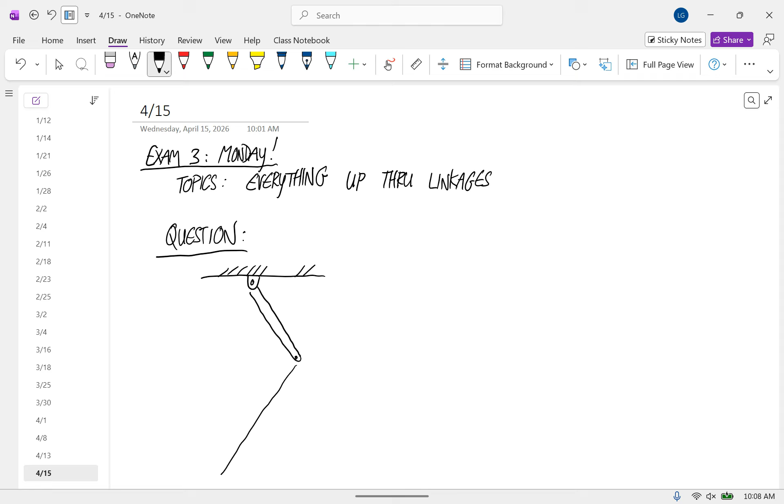But I could also specify in problems that the angular velocity of this body is this, and the angular velocity of this body is this. So think about a problem like this: let's say we have a bar connected to the ceiling here, and then a different length member connected to a pin and slot joint here.

Let's say that at this instant - call this one member 1 and this one member 2 - omega of 1 was equal to negative 10 radians per second.

So think about what's happening with member one. Is that moving clockwise or counterclockwise? Clockwise. So that's saying that this structure is flattening, right?

And let's say that omega of member two is negative 20 radians per second. So what direction is member two rotating at this instant? It's going clockwise, which says that this structure is, instead of flattening, straightening out.

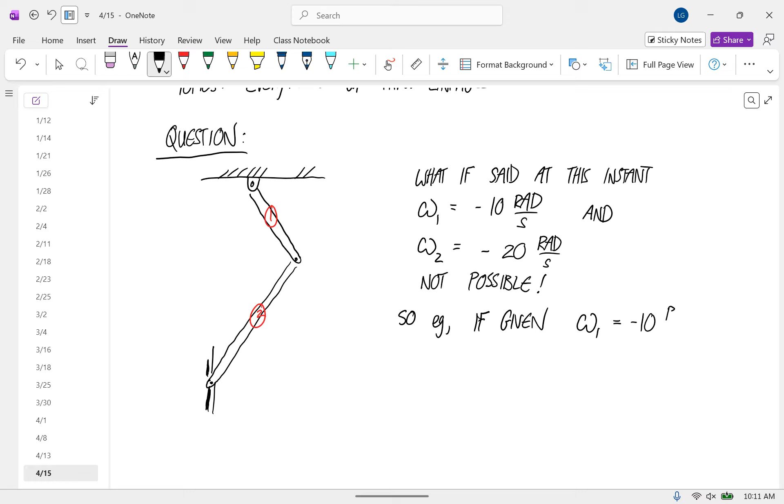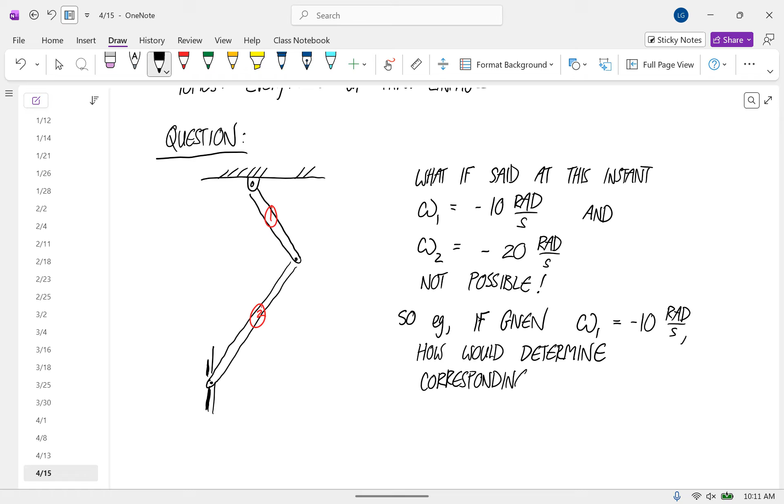For example, if we're given that the angular velocity of 1 is equal to negative 10, how would we determine the corresponding omega 2?

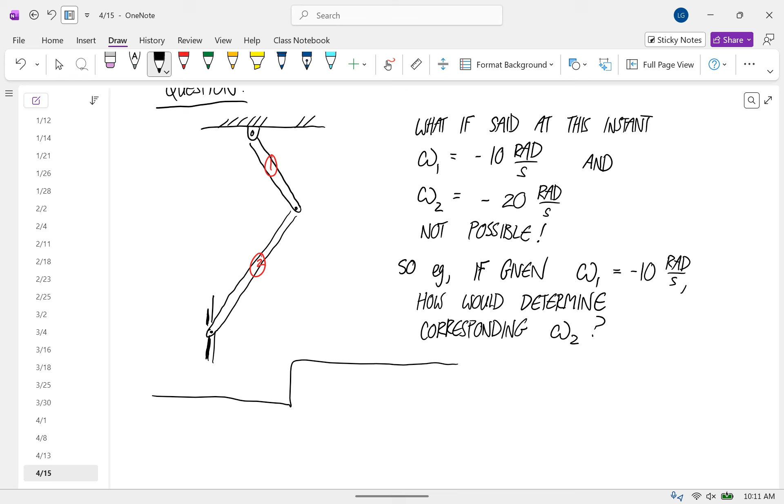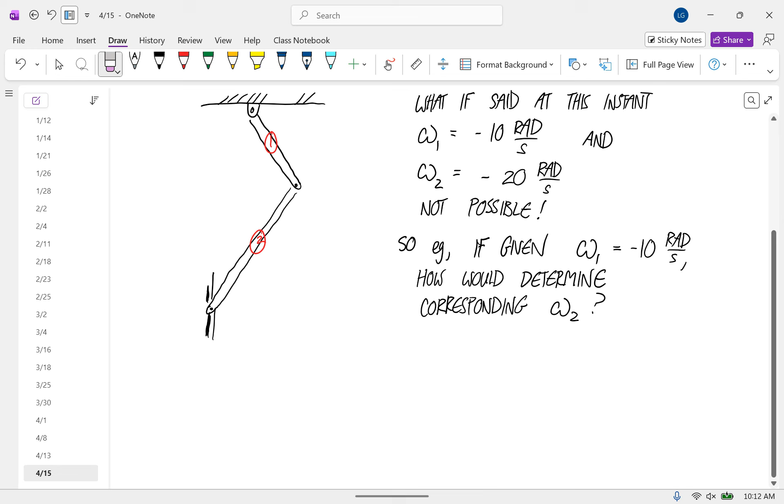Anybody have any guesses about how we would do this? It's similar to something that we've done with accelerations. So yeah, you have to use relative motion and circular motion. The basic idea is just like with the acceleration joint constraints - we'll put constraints on the velocity vector at chosen points.

Okay, so for this setup that we have here, what are the limits that we're going to put on the velocities at certain points?

So if I call this joint A, B, and C, B is going to have the same velocity. Yep, that's exactly right. So we're going to use member one to calculate the velocity at B, and member two to calculate the velocity at B, and set them equal. And then here, we're just going to say there can't be any horizontal velocity—the only velocity has to be vertical along the slot. Okay, so it works just like acceleration, but it's with velocities.

Okay, so let's do an example where we can kind of intuitively—okay, so we're going to go, in this case, the velocity at B according to body one, I don't know, I'm making up this notation, is equal to the velocity at B according to member two. And then the velocity at C, just the x component, is equal to 0.

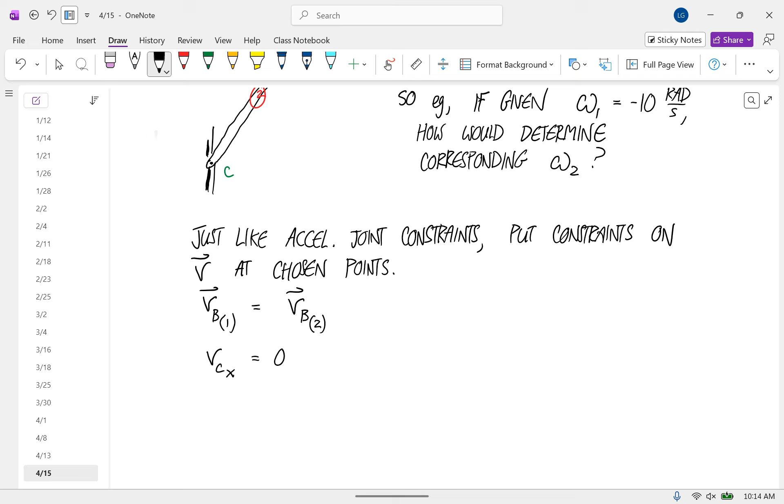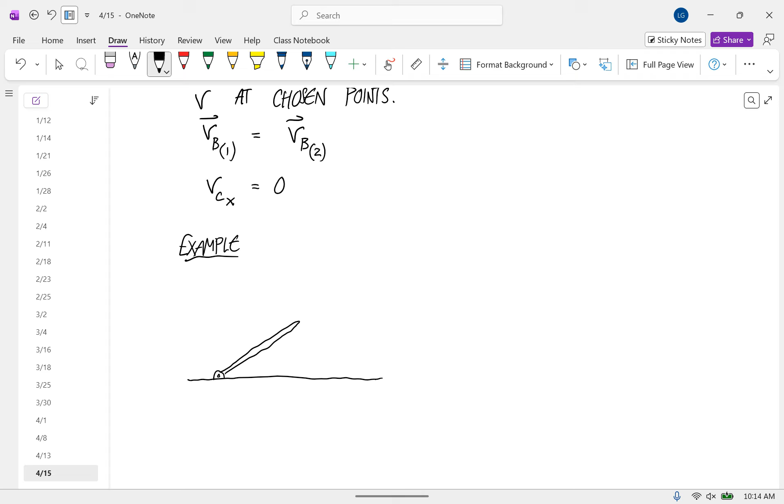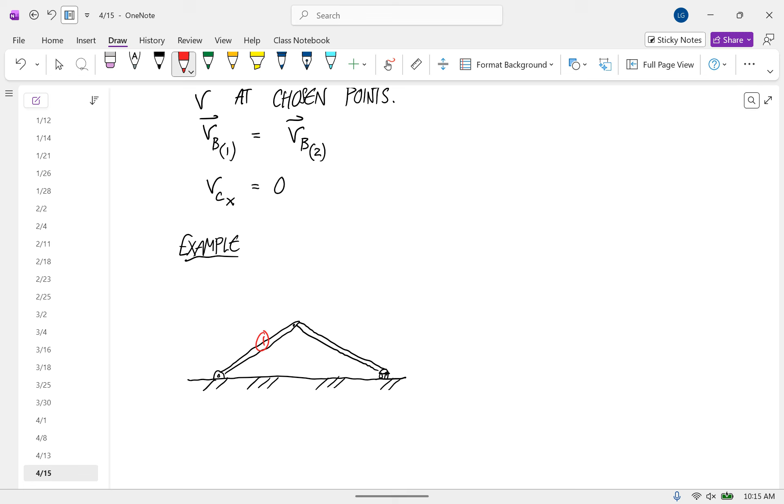Okay, so let's do an example, and I'm going to do one where we can figure out intuitively. Okay, so let's say we have one where at the instant we're looking at, okay, so that's a roller over on the right side. Let's call this member 1. This is member 2.

We're actually not going to get to the forces, but for a problem like this, let's say there's a force applied there. And let's say at this instant, we have an angle of 20 degrees. And the lengths of both of these members are 1 meter. And let's say that omega 1 is equal to, at this instant, positive 5 radians per second.

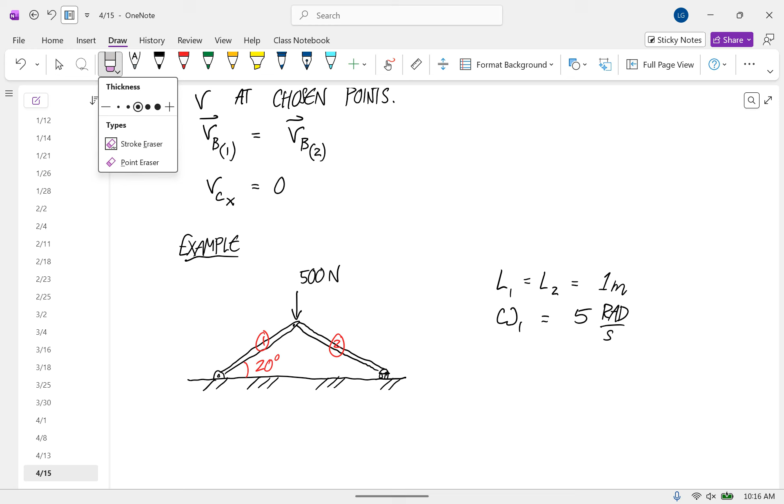So what's omega 2? Okay, so I chose a positive value of omega 1 just to be contrary. How is it possible that—so positive means that omega 1 is counterclockwise.

So this thing is standing up straighter. How is it possible that this system, with that force acting there, could have an angular velocity of, any counterclockwise angular velocity? Yeah, exactly. So, this free body diagram is instantaneous. And instantaneous stuff affects accelerations. Okay? Velocities only deal with accelerations as like an integral over time.

Okay? So clearly the angular acceleration of this is going to be clockwise. There's no way around that. But we could think of this as right up before this instant, there were forces pushing this up. And right at that instant, those forces disappeared and that 500 is applied. And the angular velocity just doesn't change instant by instant with forces. Only acceleration does that.

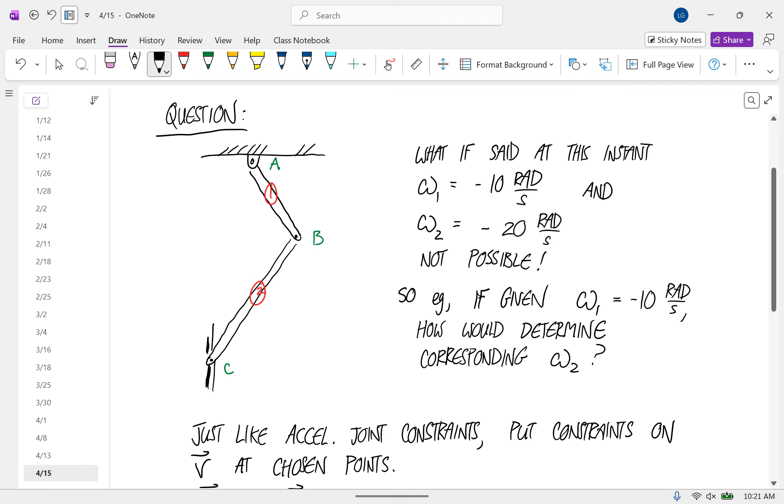In this example I drew up here, where those angles are not the same, it's more complicated. But you would do the calculation the same way. This is just one where we know going into it what to expect for an answer. So now we're going to do the calculation and see. We better get that omega 2 is equal to negative 5, or I quit.

We're going to do a velocity constraint. We have 1 and 2, let me call these joints A, B, and C. And I'm going to start with a velocity constraint at B.

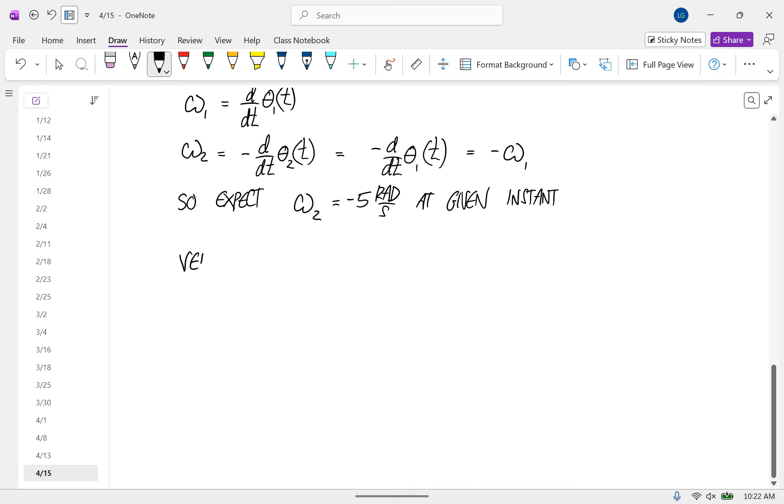According to member 1, notice how similar this is to the joint constraints we used in solving this linkage. Looking at member 1, that point B on member 1 is just in circular motion around A.

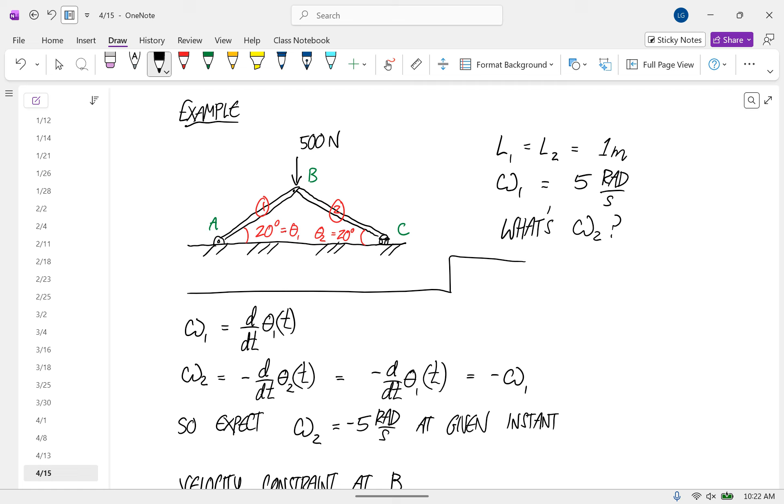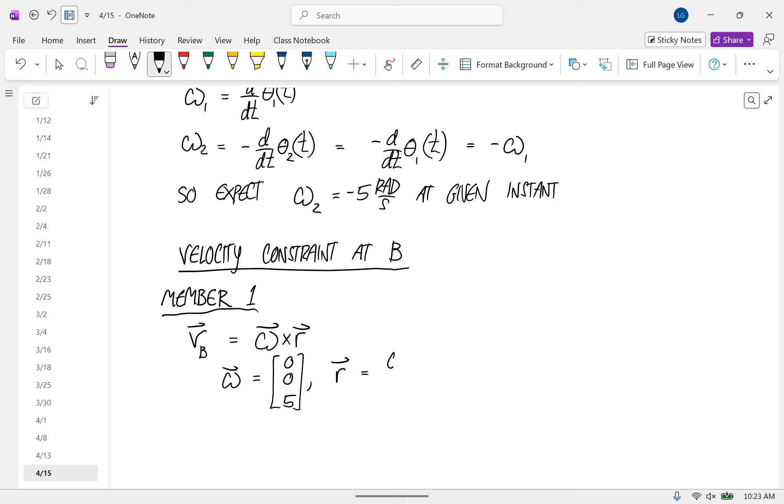So we're going to use the velocity equation. The velocity of point B is equal to omega cross R. The omega vector is equal to 0, 0, positive 5. And the R vector from the center of the circular motion to point B is the length 1 times cosine and sine of 20 degrees, so that's 0.940, 0.342.

So according to member 1, the velocity of B is equal to 0, 0, 5 crossed with 0.940, 0.342, 0. And we get negative 171, that is negative 1.71, and then 4.700. Okay, with me on that?

Now we'll go to member 2. According to member 2, we don't have a fixed center of circular motion, so I'm going to use relative motion. Like I do with acceleration, I'm going to use the center of mass here.

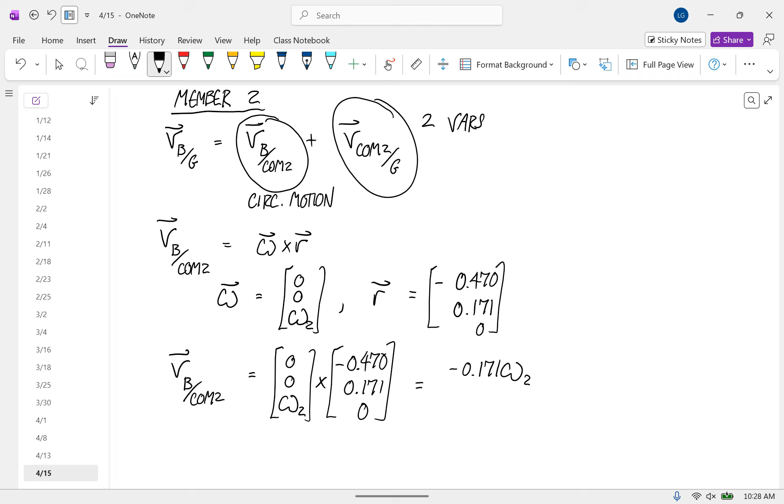So the velocity of B relative to the center of mass of 2 is 0, 0, omega 2, and R is equal to that. So this crossed with this, and we get negative 0.171 omega 2, and then negative 0.470 omega 2.

I'm going to give this a nice name, V2, like we do with accelerations. That refers to the velocity of the center of mass of body 2.

And so our constraint equation at joint B says negative 1.71, 4.700 is equal to, we have to add this to the velocity of the center of mass of 2: negative 0.171 omega 2 plus v2x, negative 0.470 omega 2 plus v2y, 0.

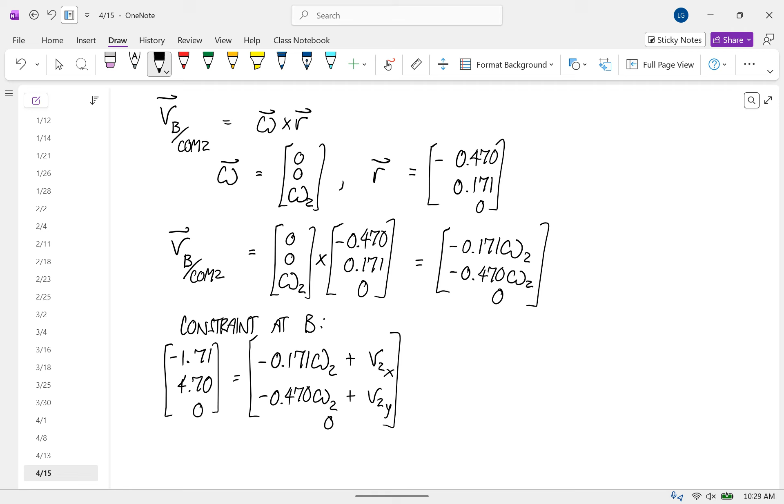So our system of constraint equations: our first one says negative 0.171 omega 2 plus v2x is equal to negative 1.71. Our second one says negative 0.470 omega 2 plus v2y is equal to positive 4.70.

Can we solve it? Not yet, but you can see where we're going. So far we have 2 equations, 3 variables. So where are we going to get that third equation? Yeah, the constraint at C.

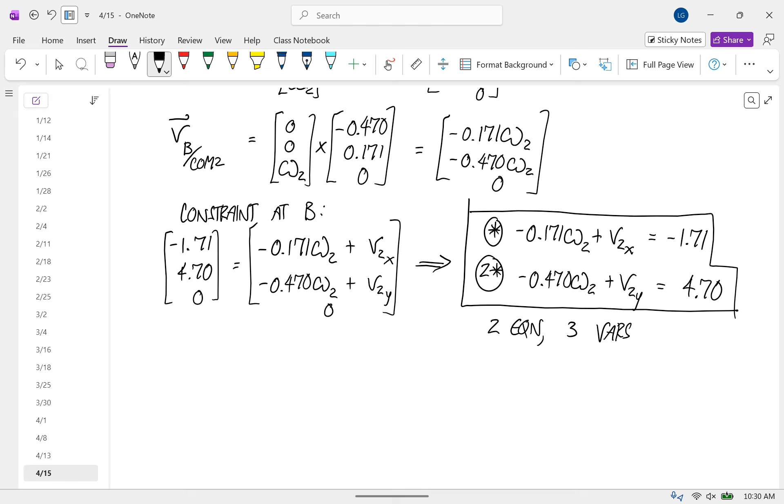Just like we do with constraint equations at pin and slot joints for acceleration, we're going to calculate the full velocity vector and just set the component equal to 0 that we know isn't moving. In this case, we know that it can't have an up or down velocity, so we'll set the y component equal to 0.

What if the slot in a pin and slot joint was not horizontal or vertical? What if it was at an angle of 20 degrees with the horizontal? I would think of it as a dot product. You could come up with a unit vector that's perpendicular to that slot, and then just set the dot product of that unit vector with the acceleration equal to 0. But you're right, you also could do it by thinking of it as right triangle trig.

So for the constraint at C, the member connected to C does not have a fixed point, so we're going to use the relative motion equation. The velocity of C relative to the ground is equal to the velocity of C relative to the center of mass of 2, plus the velocity of the center of mass of 2 relative to the ground. This one is our V2, we already have that named. And this one is circular motion.

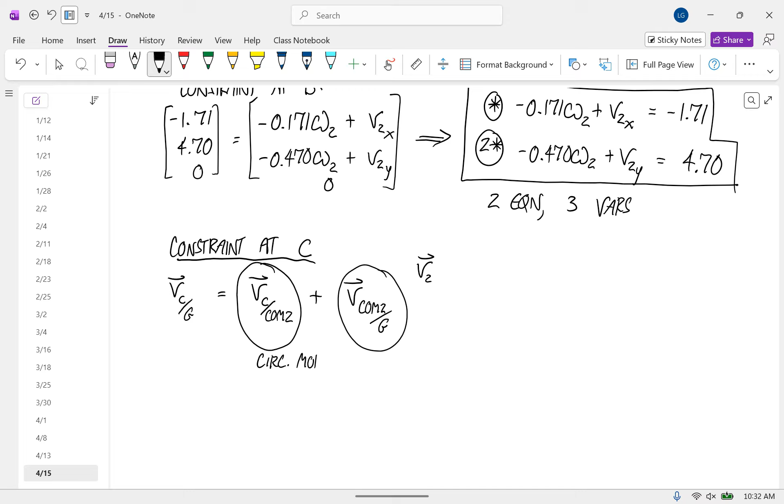So the velocity of C relative to the center of mass of 2 is omega cross r. Our omega is 0, 0, omega 2. And r is the opposite of the r we had in the last one. So that is positive 0.470, negative 0.171.

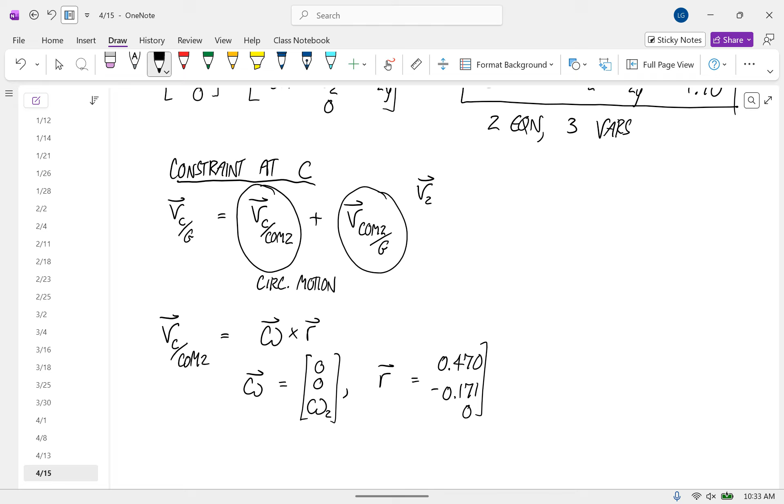So the velocity of C relative to the center of mass of 2 is 0, 0, omega 2, crossed with 0.470, negative 0.171, 0. That gives positive 0.171 omega 2, positive 0.470 omega 2.

The velocity of C relative to the ground is this plus V2. So we have 0.171 omega 2 plus V2x, and 0.470 omega 2 plus V2y, 0. We can't make any constraints on x, we don't know what that velocity is. But we know the y component of the velocity has to be 0. That's what that joint requires.

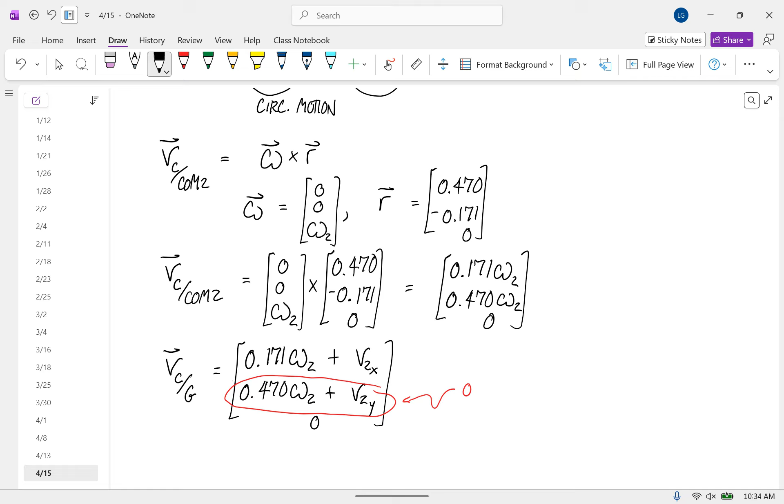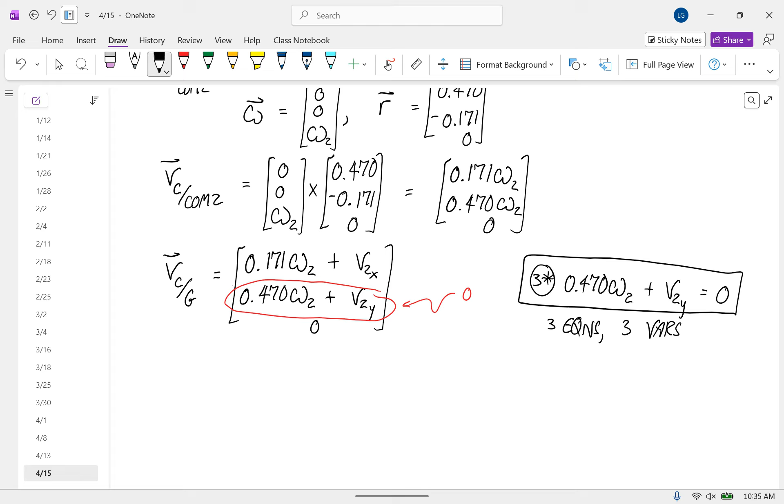Our third equation for our system says 0.470 omega 2 plus V2y is equal to 0. Now we have 3 equations for 3 variables. If we did everything right, this system of equations should spit out a velocity vector for the center of mass of body 2, which we don't care about, and an angular velocity for body 2, which we expect to be -5. So let's do it and hope.

So our augmented matrix has 3 rows, 4 columns. This is equation 1, 2, and 3. For variables, let's call it omega 1 - nope, omega 1 is not a variable, we knew what that one was. Omega 2, V2x, V2y, and the constants.

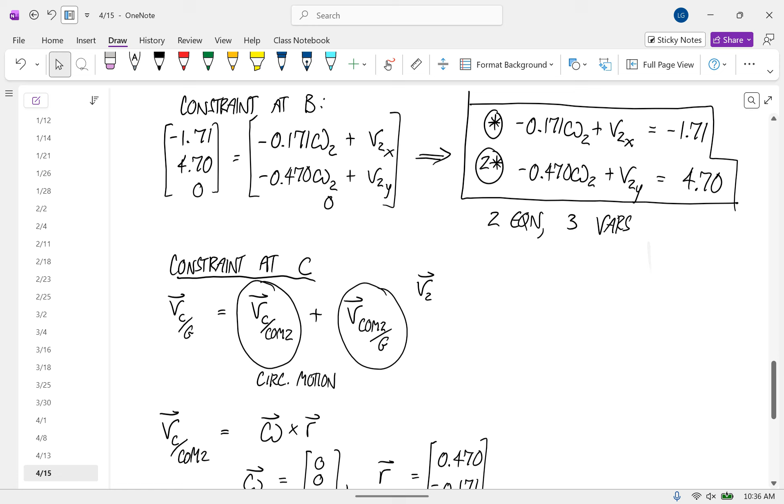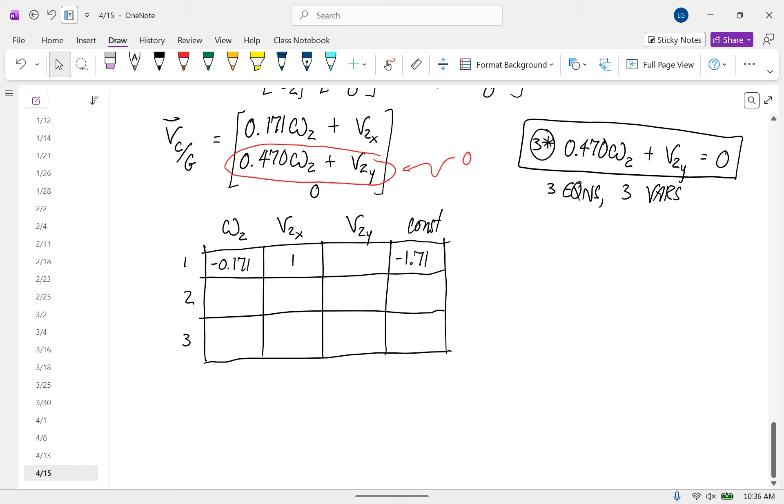So for omega 2, we have -0.171. For V2x, we have 1. For the constant, we have -1.71. Now equation 2: omega 2, -0.47; V2y, 1; and the constant, 4.70. And for equation 3: omega 2, 0.470; V2y, 1; constant 0.

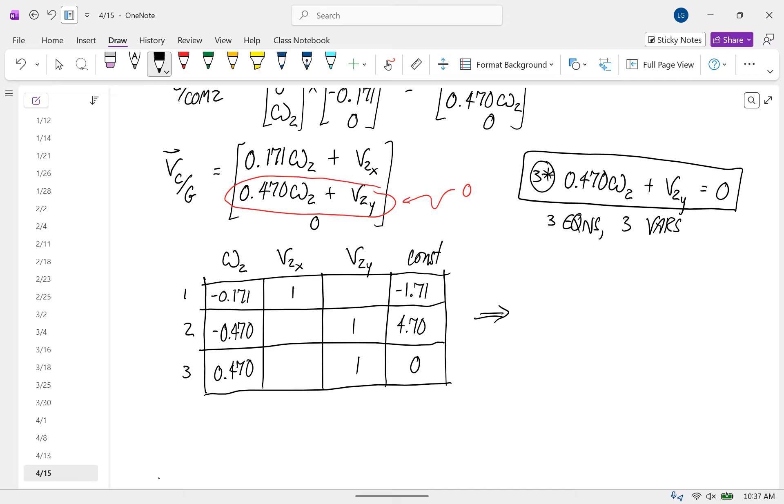We've been doing rigid bodies. You weren't here on Monday, and I was so conscious, like I better turn this on because no one's going to tell me if I don't. Okay, we've been doing rigid body kinetics and doing that with linkages.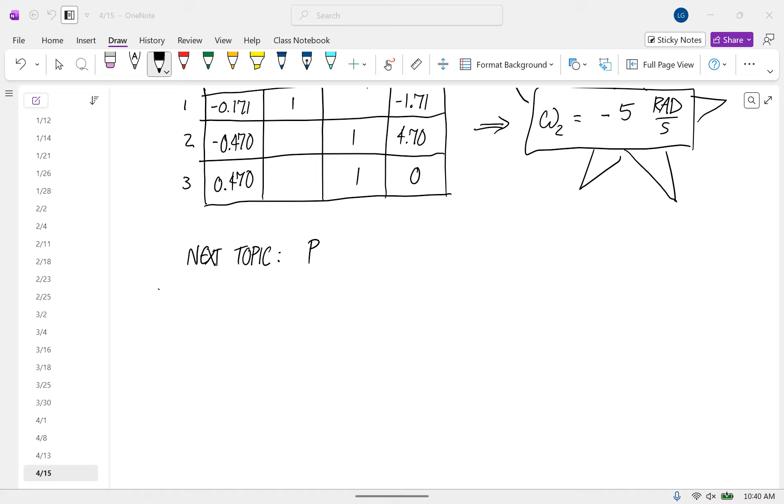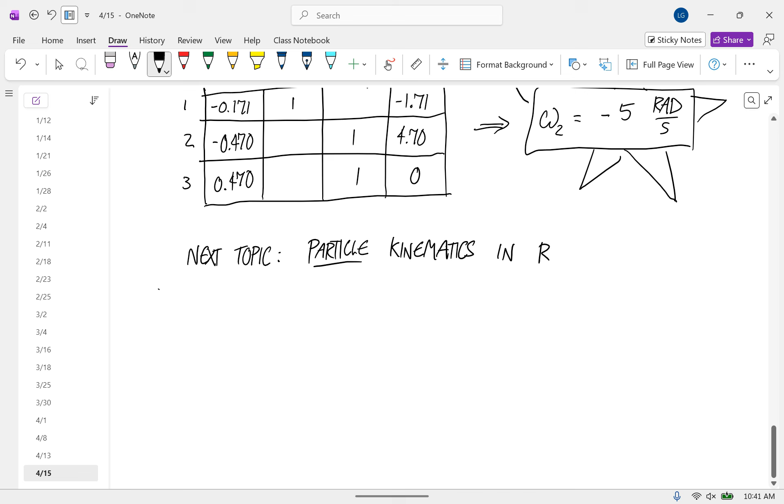Now we're going back a step to particle kinematics and particle kinetics. Remember that here we're just dealing with particles. I'm going to start with kinematics, but the difference between particle kinematics and particle kinetics isn't much - you're just multiplying by masses, basically. But we're adding a horrifying new bit of complexity: now we're going to deal with rotating coordinate systems. Notice that we're going back from rigid bodies to particles.

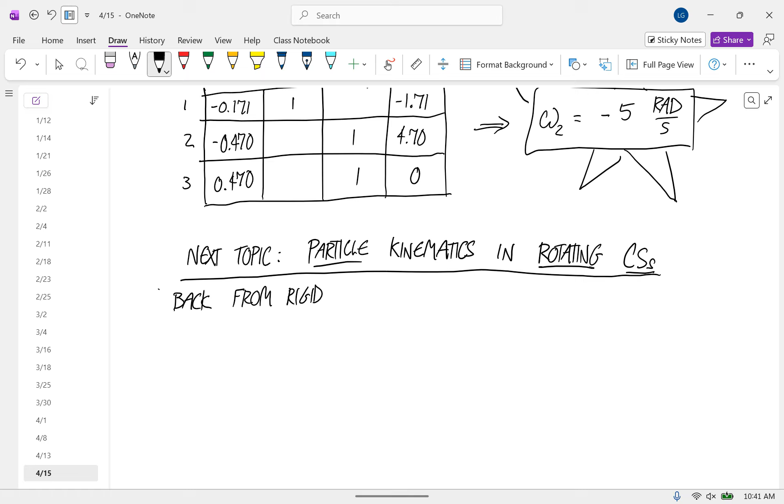There are two types of coordinate systems, or let's say there are two ways that a coordinate system can fail to satisfy Newton's laws. Another way to say that is there are two ways that a coordinate system can be non-inertial. If you have a non-inertial coordinate system, the measurements you take in that system, if you put them into Newton's laws, it's going to look like Newton's laws don't work. So the first one is that the origin of the coordinate system is accelerating.

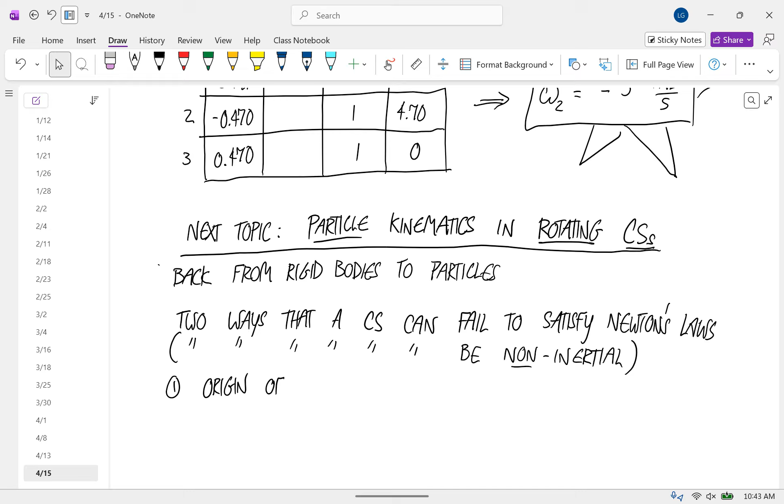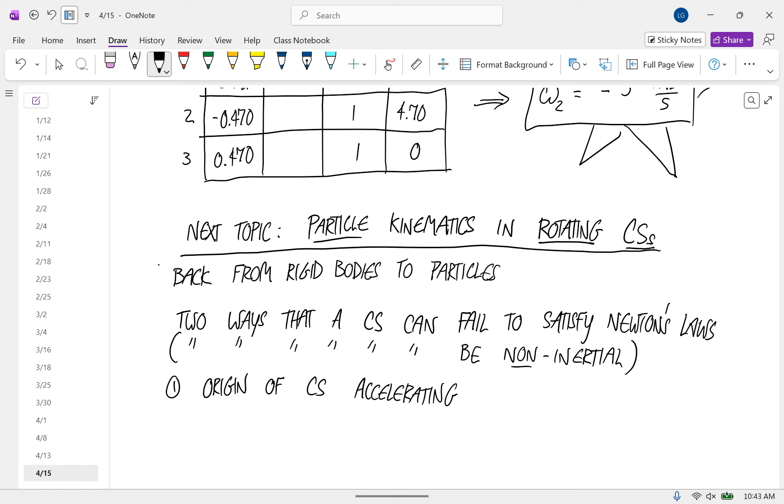We're doing classical physics now, so if anybody here is taking modern physics, this might contradict the way you think about things. In classical physics, there really is such a thing as a true non-accelerating thing - that's a universal property. Something either is or is not accelerating. And if that's your problem with your coordinate system, we've dealt with things like this before. How do you deal with that so you can come up with numbers that can be used in Newton's laws?

Yes, exactly. So we deal with this - all I'm thinking about is that video, the Jamiroquai. Exactly, that's what I want you to think about. Oh, the song. Yeah, sure. Actually, you know what's funny, that just came on like a Pandora playlist at our house the other day, and my wife was like, 'This is that song you like.' And I was like, 'Yeah, that's my favorite song for physics.'

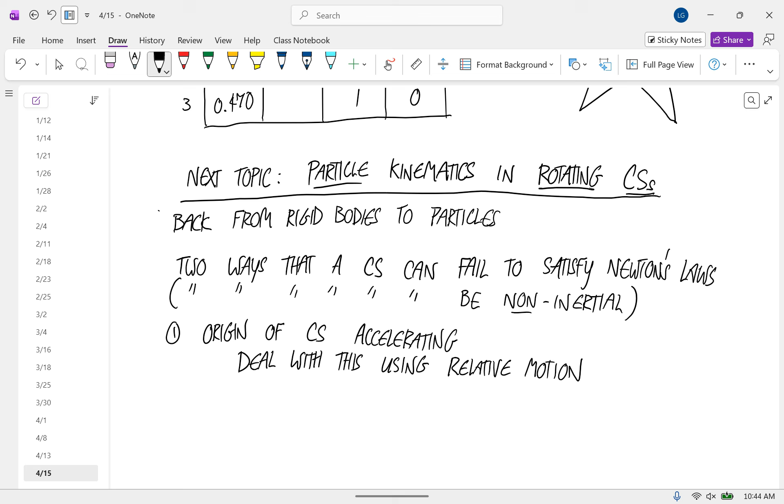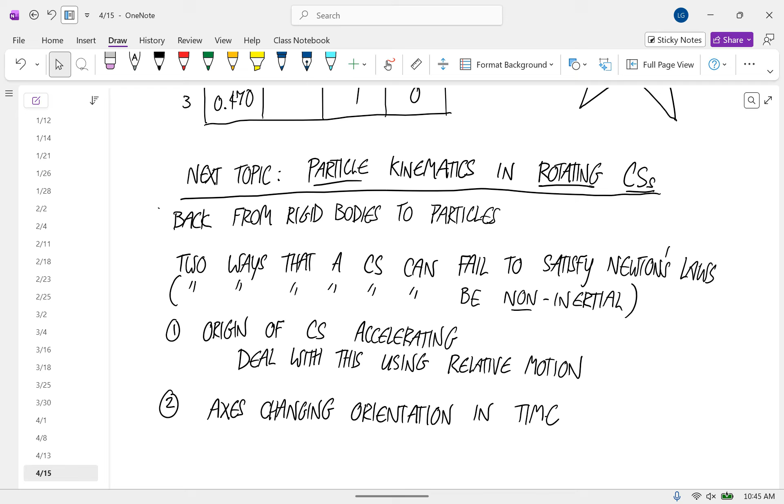Okay, so we deal with this using relative motion, and we've already done that many times, and it's not too hard to do. The second way a coordinate system can fail to be inertial is that the axes are changing orientation in time. Another way to say that is it's a rotating coordinate system. And this is the topic we're covering now, so we'll learn how to deal with this.

What if you have a coordinate system that is rotating and the origin is accelerating? It's not extra bad, really. You just have to deal with the rotating coordinate system and then take that answer and use relative motion. So you just have to do both of them.

First, before relative motion, is the stuff that we're going to learn now. And one thing I want to make a note of here is, notice...

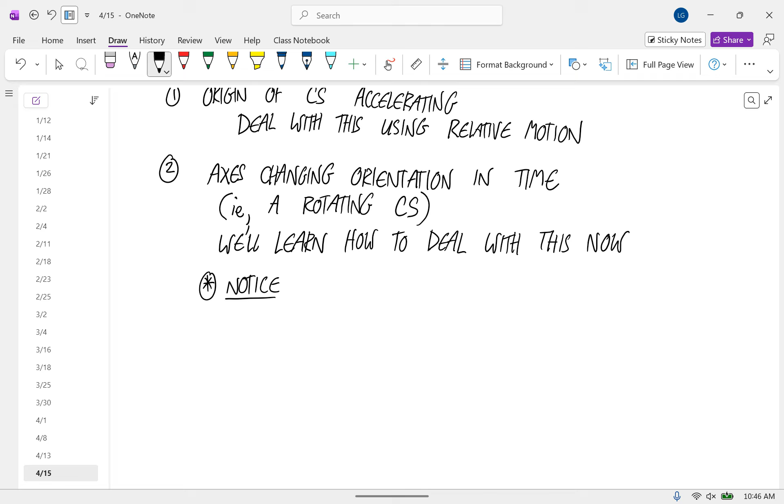A rotating coordinate system is not just, so a lot of times I think this is the first thing people think of, that a rotating coordinate system maybe is just a matter of the coordinate axes being misaligned. Like if this thing's rotating, say you have this reference coordinate system that's not rotating, and then this one you're trying to do calculations for, at a given instant those coordinate systems aren't in alignment. So is that what we're talking about with rotating coordinate systems? No. That's another thing you really do have to deal with, but that's just dealt with using a rotation matrix, and that's pretty quick and easy to do.

We're talking about the effects caused by, as this thing's moving, say your snapshot happens to be right as those two things are aligned. Then you don't have to deal with any misalignment of the coordinate axes, but you still have to deal with the fact that this has an angular velocity. So that's what we're talking about. A rotating coordinate system is not just a matter of misaligned axes.

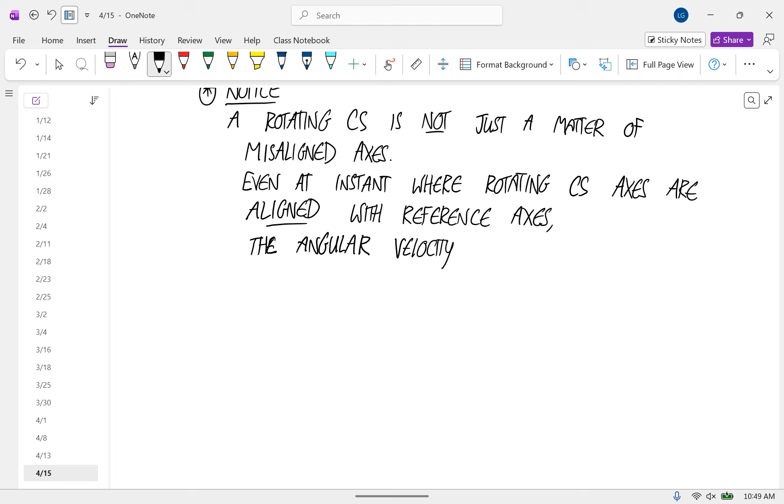So let's say even at the instant where your rotating coordinate system axes are aligned with your reference axes, the angular velocity of the rotating coordinate system causes, let's call them problems.

Well, I like to think of it as the angular velocity of the rotating coordinate system causes opportunities, because those other dummies won't know what to do and you guys will. And that's why people will hire you.

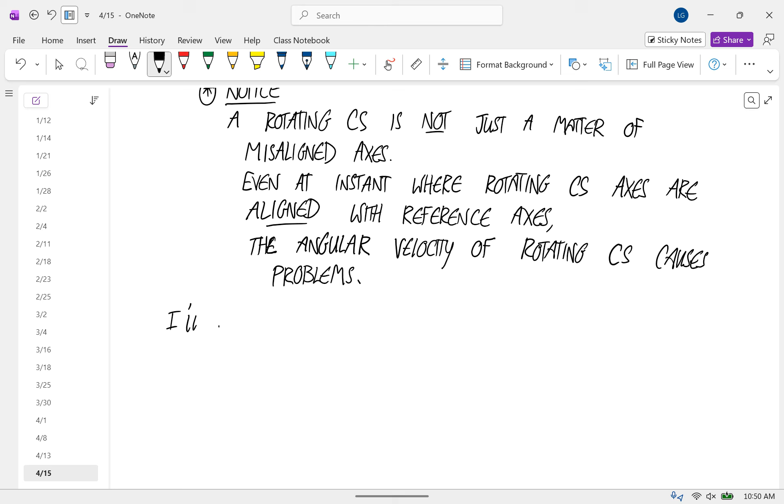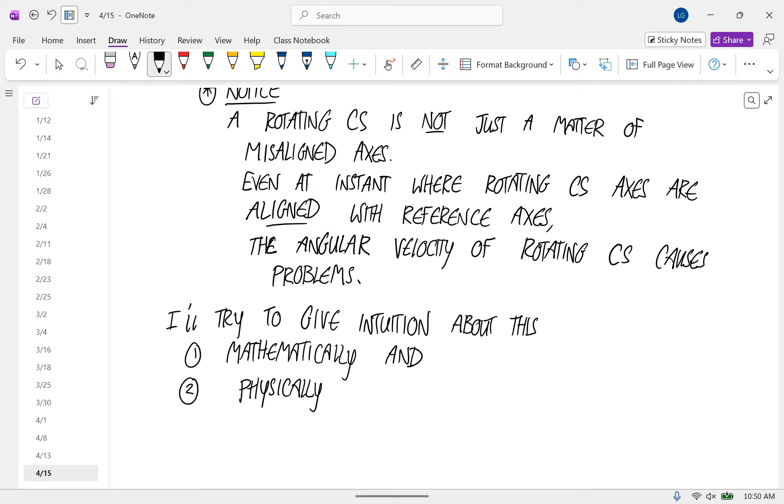Okay, so I want to try to make this intuitive to you in two ways. We're going to first talk about the math, and then we're going to talk about just an intuitive understanding. I'll try to give intuition about this, first mathematically, and second physically. Hopefully these two things are things you can go back to and remind yourself about when you get confused about what's going on. So here's the kind of mathematical intuition.

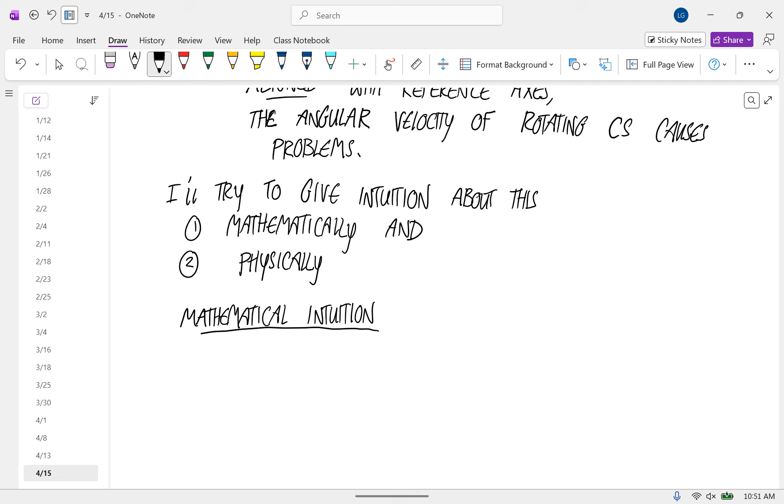So let's say that you're given a vector, we'll call it u, so it can represent anything - a force, an acceleration, a velocity, a position, anything that's a vector quantity, that's what this u can represent. Instead of using the notation I always use, we'll think about it as what it is: there's a component ux multiplied by some physical unit vector I, plus a component uy multiplied by a unit vector j in the y direction, plus a uz times a unit vector k.

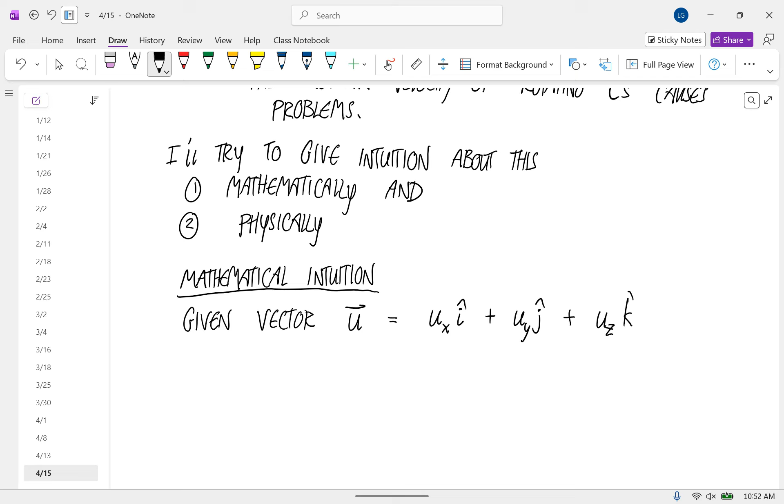And the key step, I guess, is what happens when you take time derivatives of this vector u. So the key step is what happens when you take d/dt of u, or by definition that's u dot. Now we have to use the product rule, because for each one of these terms we have a number times a vector.

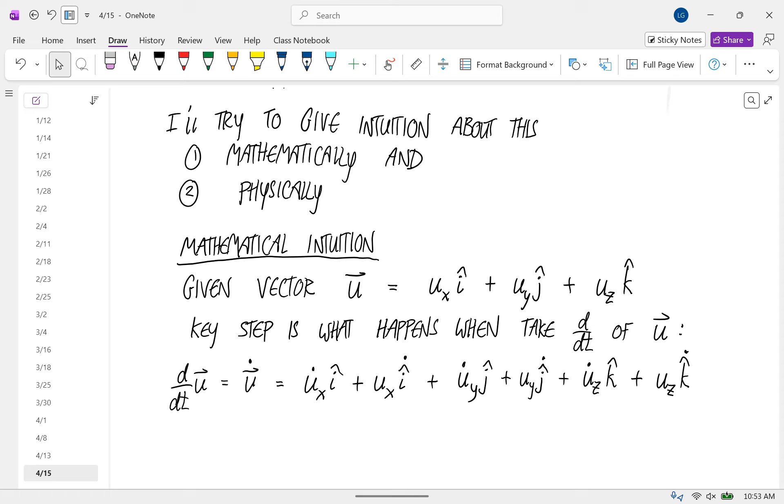And the product rule says this is equal to ux dot times I plus ux times I dot, plus uy dot times j plus uy times j dot, plus uz dot times k plus uz times k dot. And I'm going to regroup, so this gives us ux dot times I plus uy dot times j plus uz dot times k, and then plus ux times I dot plus uy times j dot plus uz times k dot.

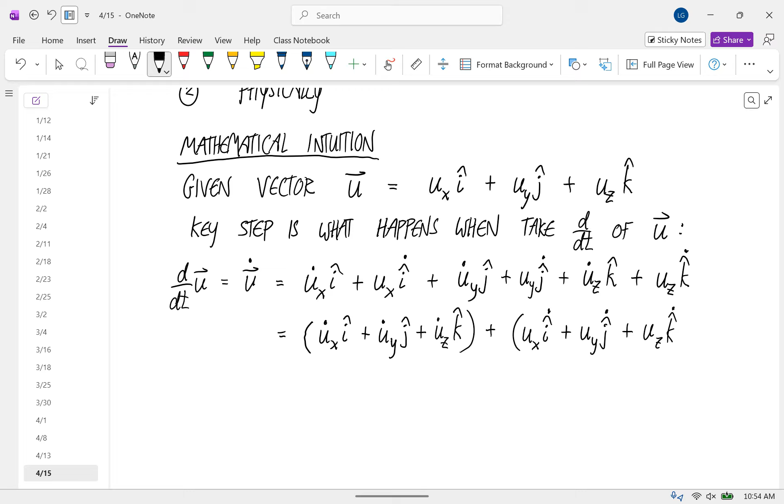So if this vector u is measured in an inertial coordinate system, so if it's not rotating, if u is measured in a non-rotating coordinate system, then I dot, j dot, and k dot - well, those are unit vectors in the directions of the axes. So at second 1, one of them is pointing this direction, and at second 2, if it's not rotating, then it's in the exact same direction. So those are all equal to 0. Okay, are you with me on that?

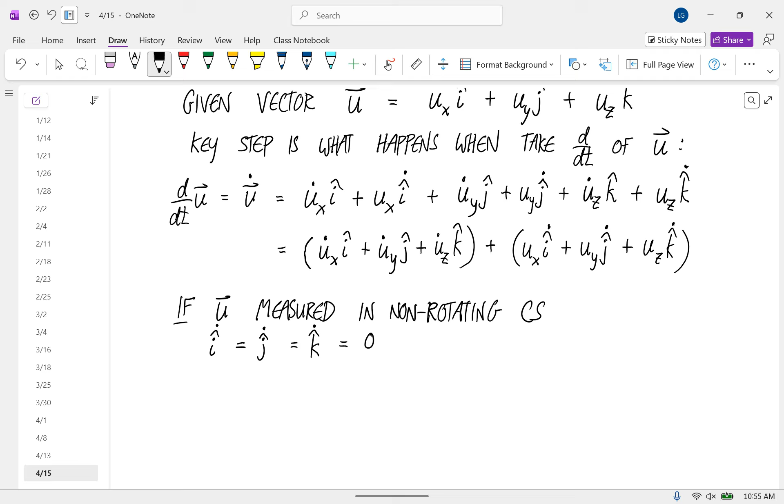Can you draw something? Yeah. So you can think of your unit vector I is this, your unit vector j is this, and your unit vector k is this. This is at instant 1. At instant 2, if it's not rotating, then these aren't going to change - that's what not rotating means. And so if things are not changing in time, then the time derivative is 0, and so what that means is this second set of parentheses goes away, and our u dot is just equal to the first one.

Or in other words, it's exactly what we saw in the past. To put it back in our notation, it's just this. It's easy, okay.

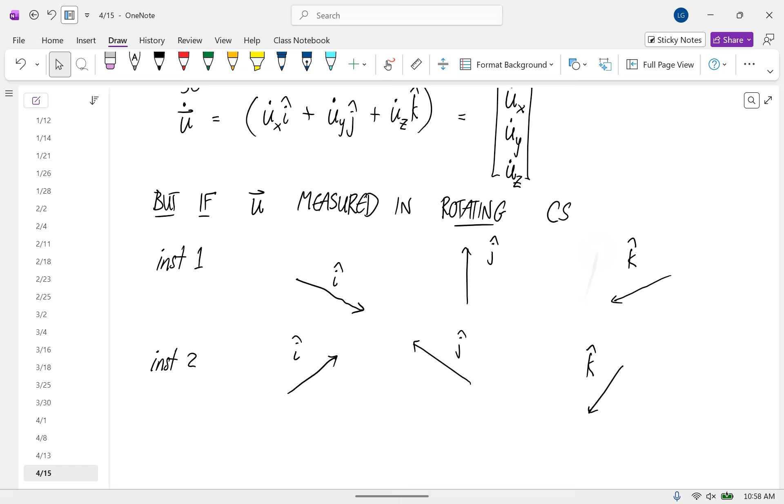But if this vector u is measured in a rotating coordinate system, then at instant 1, our I is this way, our J is this way, our K is this way, and at instant 2, our I now is this way, our J is this way, and our K is this way. So that means I dot is not equal to 0, J dot is not equal to 0, and K dot is not equal to 0. And that's a problem because what are these things? We don't have any way to represent those.

Okay, so just a review of what we're talking about. You can define that vector u in a non-rotating coordinate system or a rotating coordinate system. There's no problem with that, okay? The problem comes when you do what to that vector? Yeah, when you take that time derivative, that's when the problem comes in. And so we need a way to correct our time derivatives.

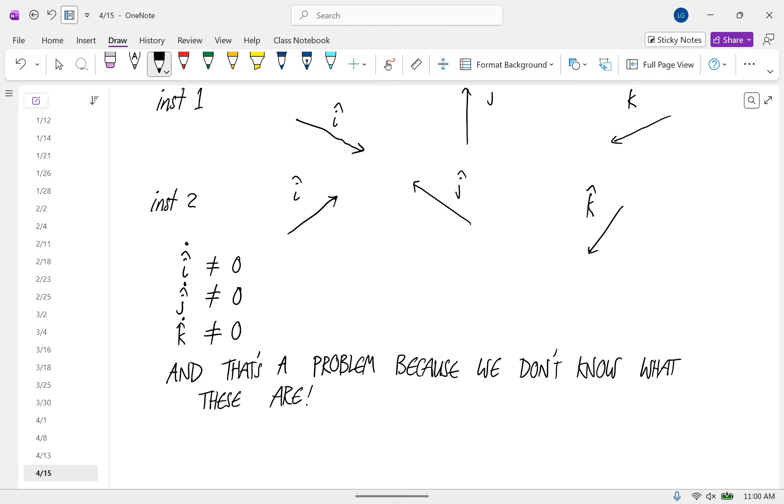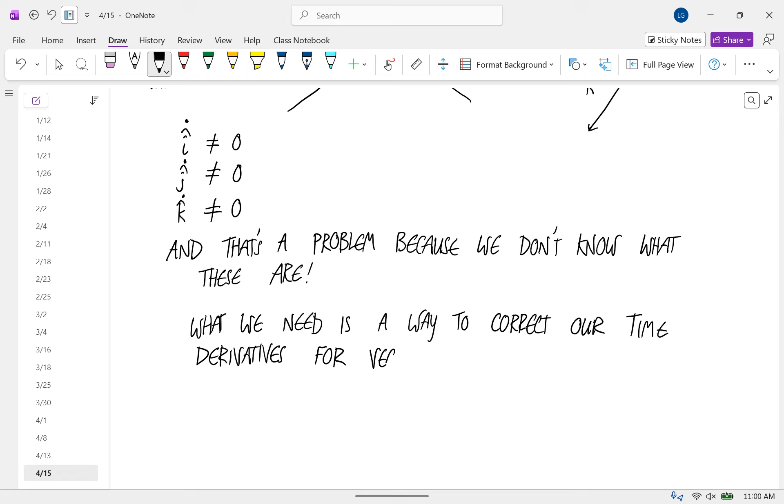So what we need is a way to correct our time derivatives for vectors measured in rotating coordinate systems.

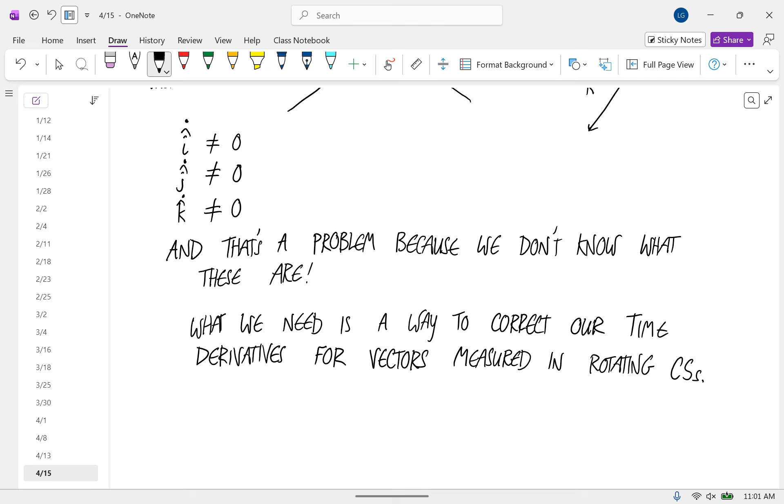So now that is the mathematical intuition. So now we're going to do the physical intuition. And I actually think I've drawn this out before, but we're going to do it again.

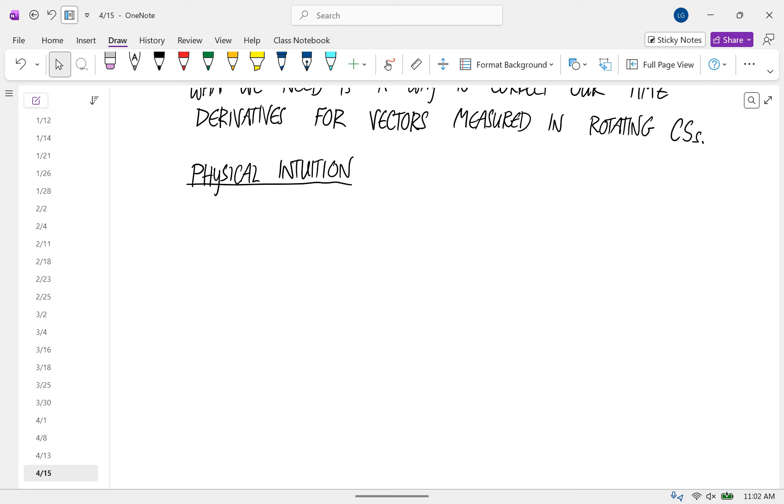So this is the centrifuge thing that they use to train astronauts and fighter pilots to deal with high Gs, big accelerations. If you think of 1g as 9.81, we're dealing with many times the acceleration of gravity - 20, 30, 40 meters per second squared. In a high performance fighter jet, you can experience many times that. You have to train yourself not to go unconscious because they don't care so much about the pilots, I don't think, but they don't want to smash their planes into the mountains.

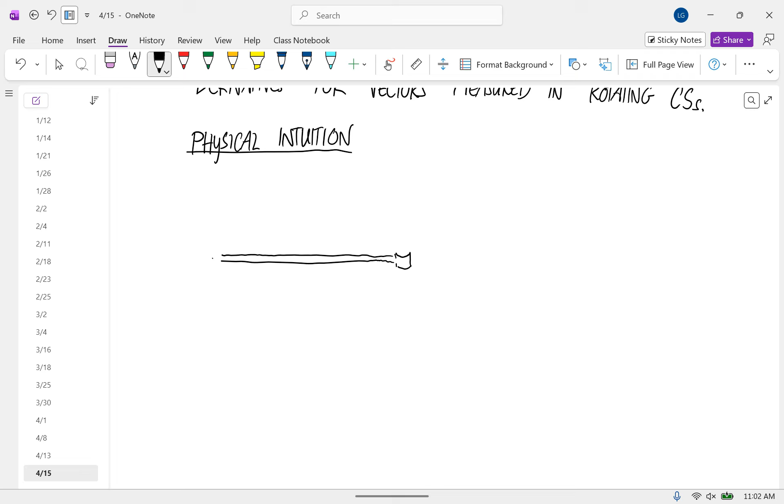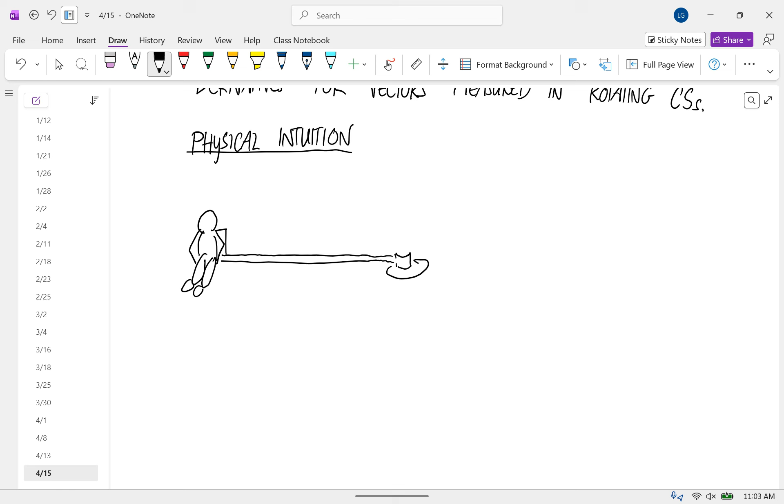So they have to train their pilots so that in these extreme maneuvers they can keep from blacking out as the acceleration forces their blood away from their brain. What these things look like is you have a hinge in the center of rotation and a long arm with a chair at the end of it, something the pilot can sit in. The pilot is in this chair, and this spins around, and the pilot spins around like that. Yeah, it's got to be unpleasant.

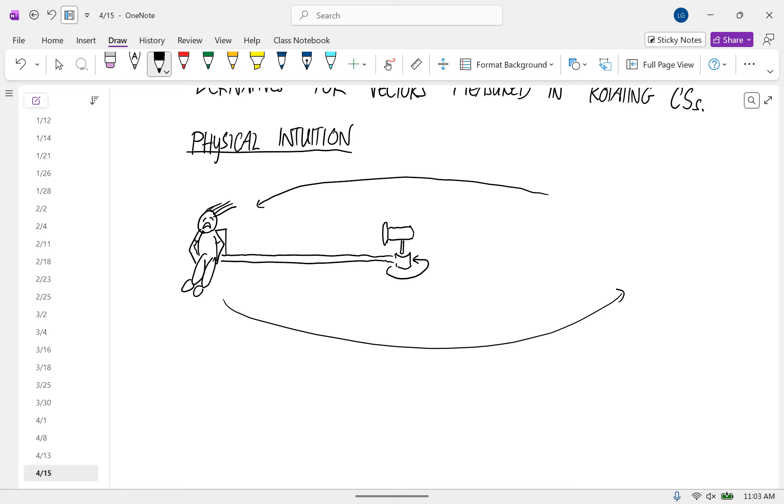And what we're going to imagine is that there is a video camera. This video camera is our coordinate system, and this camera can do two things. So it functions as our coordinate system. Let's say our x-axis is going to be this way, our y-axis is going to be up, and our z-axis is going to be like that.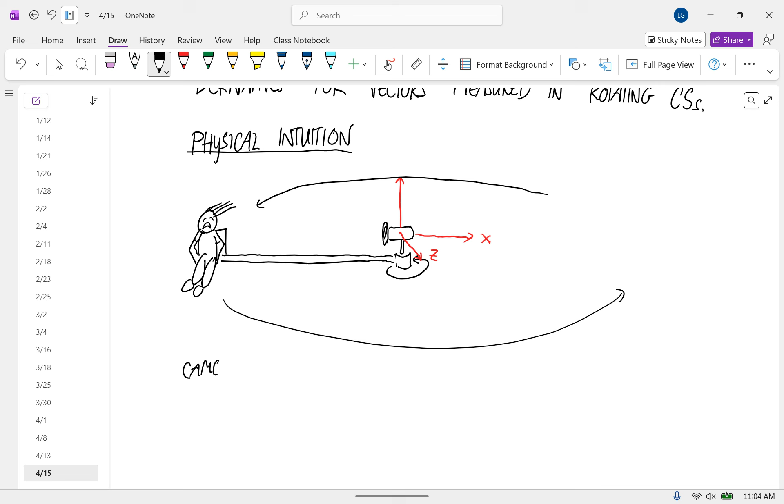But this camera can do two things. The camera can stay fixed in that orientation, or it can rotate with the arm. So if it rotates with the arm, that means it's always looking at the pilot.

Okay, and let's - so I think in Physics 1 lab, you did things where you took finite measurements close together, and did essentially a numerical calculation of velocity and acceleration from looking at positions, right? You used a difference equation instead of a true derivative, thinking that if we do them at close enough instants to each other, this difference equation is going to give us a similar answer to a derivative.

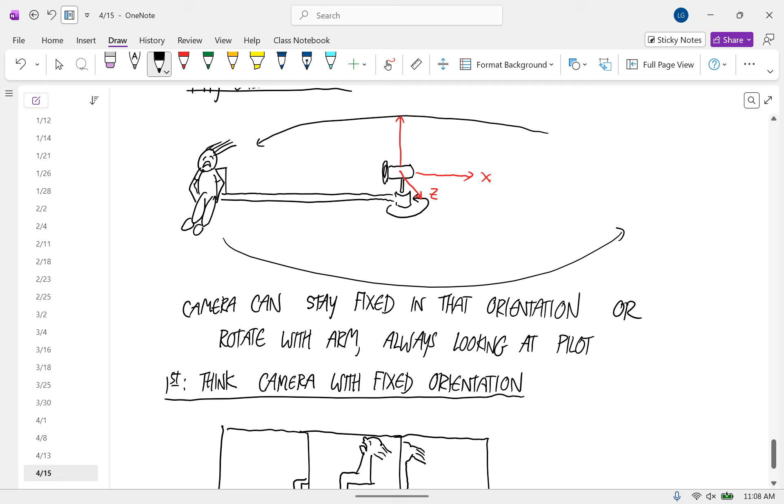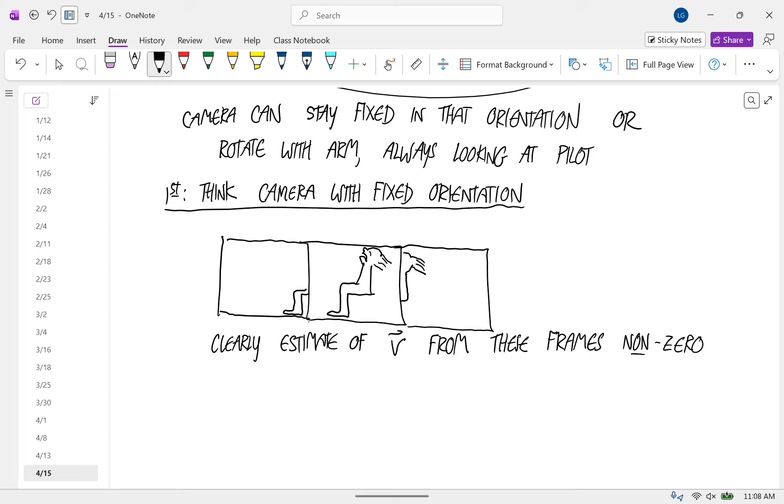Say that this chair had force sensors in it. Those force sensors are going to read big values as this centripetal acceleration gets bigger and bigger, spinning this guy around. So if you combine what the force sensors in the chair say with what you measure for acceleration in this non-rotating coordinate system, you get a match between those. Newton's second law appears to hold.

So let's just go the same with the acceleration. And Newton's second law holds for these measurements.

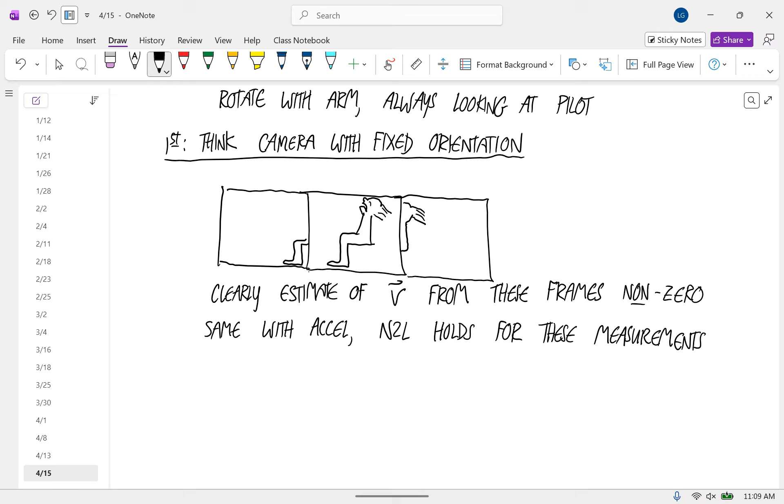Okay, so now we're going to do the camera rotating with the arm. And we'll do the same thing again. Think about this film strip with three frames.

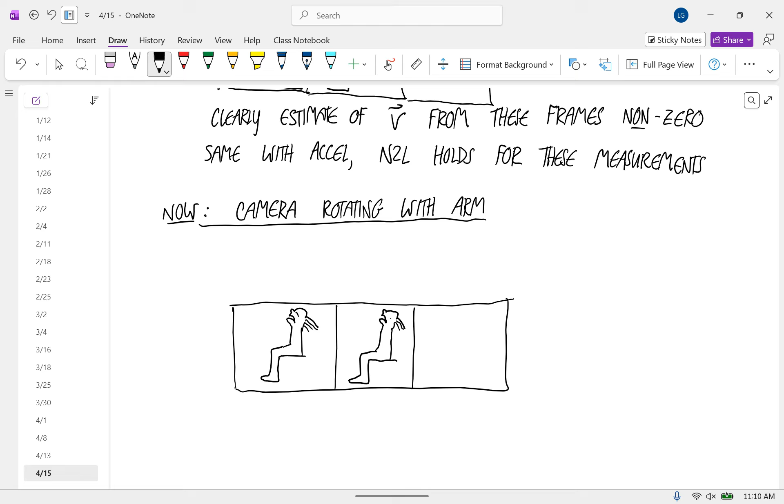So now in those same three instants, what does the camera see at instant one, the first relevant frame? Yep, it sees the person right in the middle of the frame. Most of this example is just drawing this guy. What does the camera see in the second frame? Okay, you get it. And then in the third frame, same thing. And it's that way for the full rotation around.

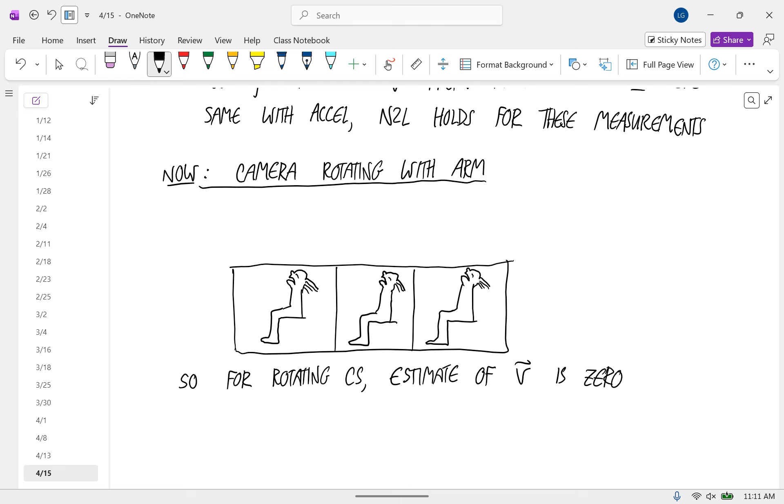So for the rotating coordinate system, the estimate of the velocity is zero, which we know is not true. And it's the same with the acceleration. And that means that force sensor is still reading the same non-zero values. So Newton's second law does not hold for accelerations measured in this rotating coordinate system.

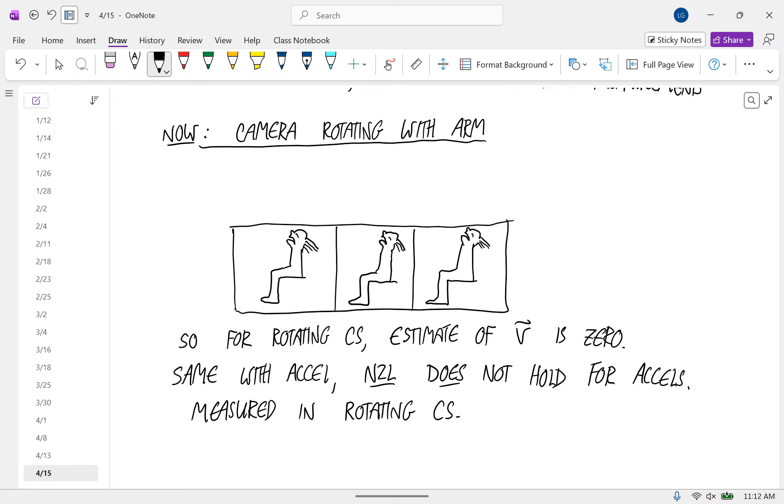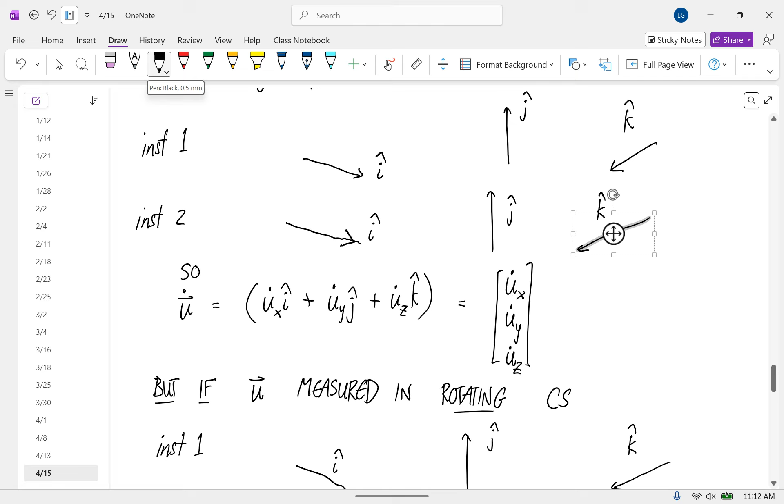Okay, so that's what we're dealing with. We need ways to correct the accelerations that we measure in rotating coordinate systems because there's this fundamental problem. And that fundamental problem comes mathematically from these i dot, j dot, and k dot not being equal to zero.

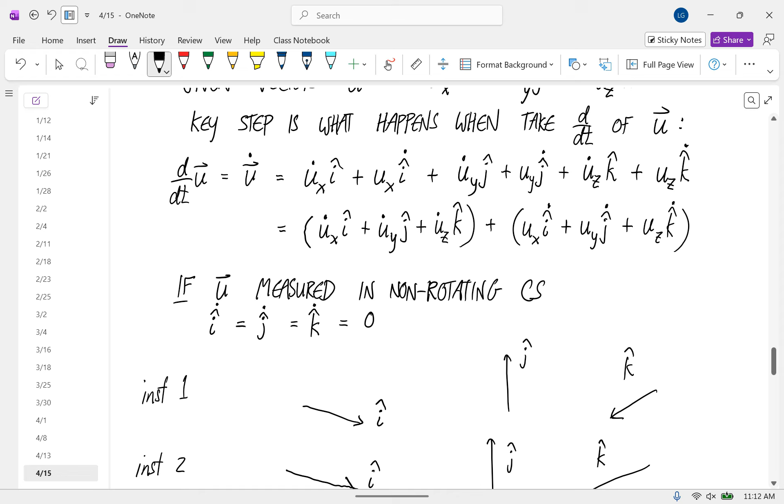Okay, so we need to correct time derivatives taken in rotating coordinate systems. So that's the bottom line here. Anytime, if we're just measuring something at a single instant, that's fine, the coordinate system can be rotating. But if we want to take a time derivative, then we have a problem that we have to deal with.

And so I'm just going to give you this result. Next class, I'll give you a little intuition about it in 2D at least. So to correct this, here's what you use. I'm going to call this the big result. This is what everything else in this section comes from.

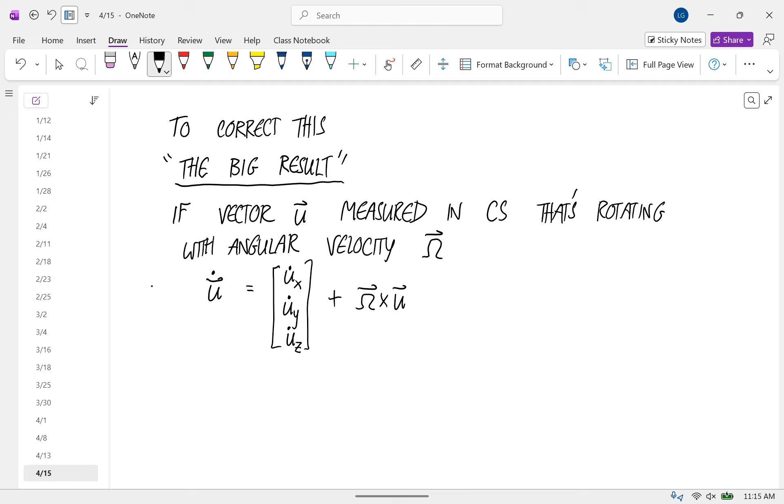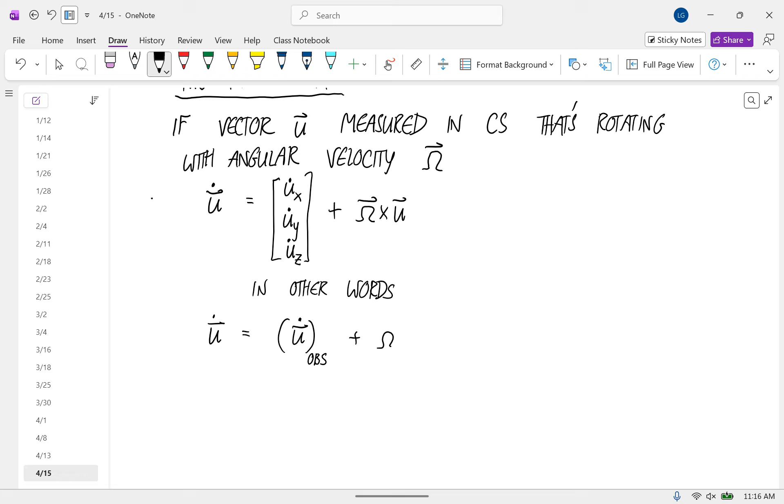There's another way to say that, and each one is useful in its own setting. So in other words, these are equivalent: u dot is equal to what the coordinate system thinks u dot is -- I'll write OBS for observed, the observed time derivative -- plus the angular velocity of the coordinate system crossed with u. This is the big result. Everything is going to be based on this.

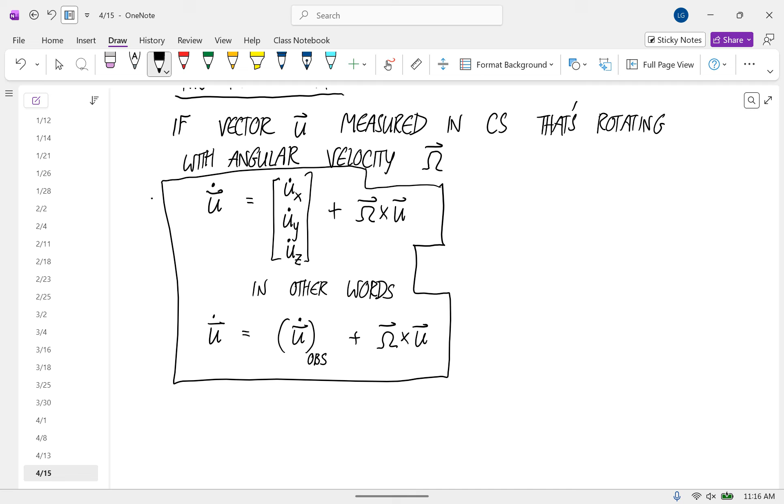Well, what is u? Is that a position vector, a velocity vector, an acceleration vector, a force vector? Position vector. It could be anything. It's true that for us, a position vector is going to be an important thing, but this is true for any vector that you measure in a rotating coordinate system. But now what we're going to do is apply this derivative rule to position vectors to come up with a corrected velocity vector and a corrected acceleration vector, because really the key thing for us are these acceleration vectors. That's what we put into Newton's laws.